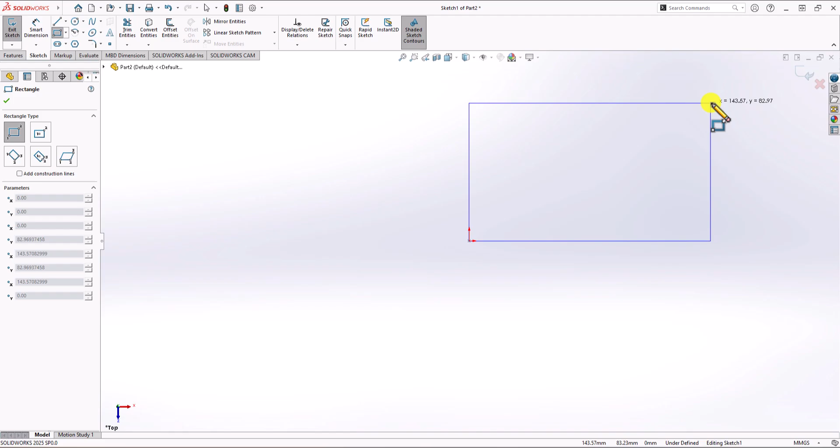In SolidWorks, first thing first, we need to check unit of measurement, and you can see we have millimeter gram second, which is a correct unit of measurement. Now, I'm going to start with a sketch, click on a sketch, and I'm going to choose top plane. Now, what we need here is a rectangle. Click on rectangle command, and then here I have the rectangle. Looking at the question, you can find the dimensions for this rectangle. Click on the smart dimension. The width should be 260 and the height should be 180.

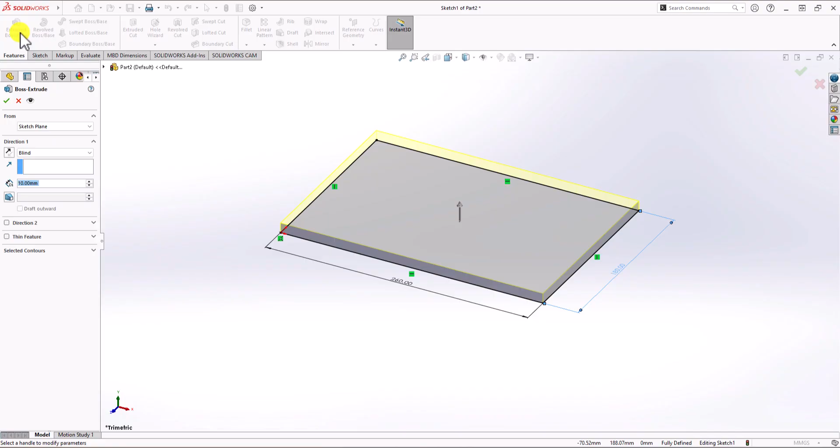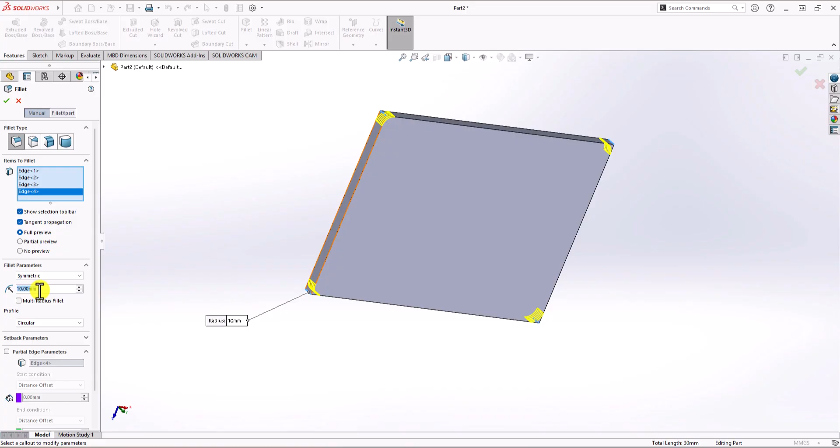Okay, so now I have the plate. Let's click on feature, click on extruded boss, and I need 10 millimeter thickness, which is here, and then click on OK. So now I have the plate. Of course, we need the fillet radius in the corners. So let's click on fillet. And then here, I'm going to select this corner, this one, and last one. The radius for the fillet, according to the question, should be 15 millimeters. So this is 15, click on OK, and now I have this plate.

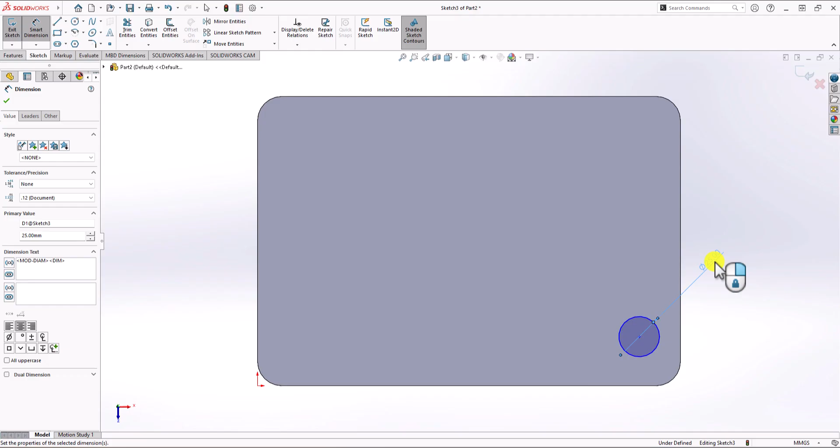Okay, so now it's time to make one hole. Click on a sketch, click on top surface, and this surface is selected. Click on circle command, and I'm gonna make one hole here. According to the question, the diameter of this hole is 25 millimeters, so this should be 25. The distance between the center of this hole and right edge should be 40 millimeters. So I click on this center point, right edge, and this should be 40. And the distance between the center point and a bottom edge should be 45.

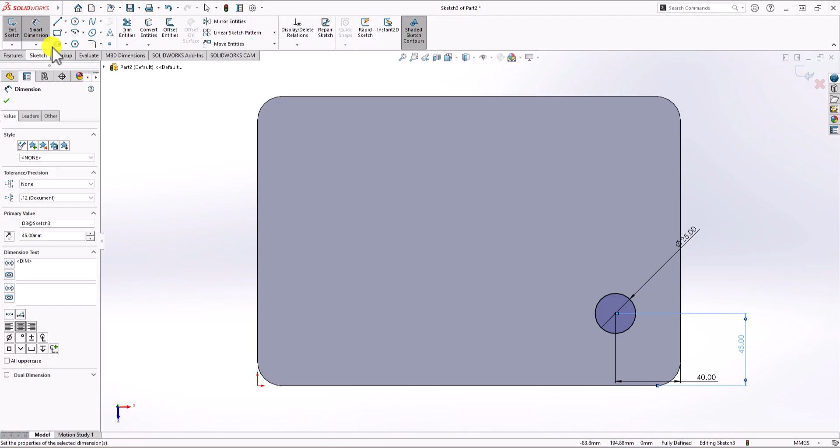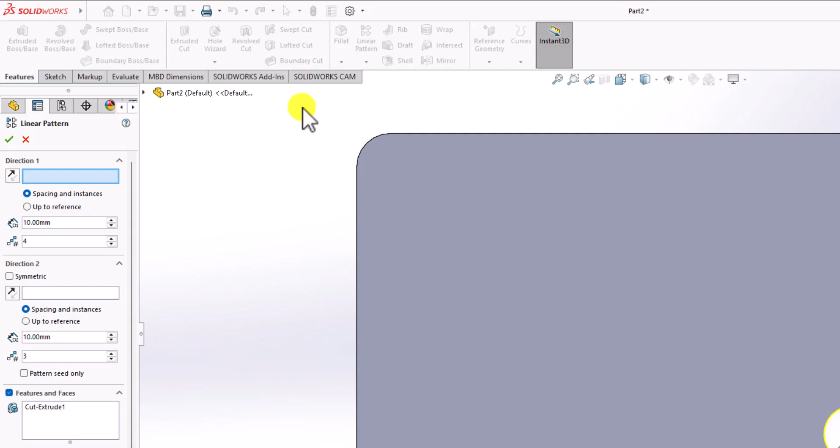Okay? Now, all we need to do is just making that hole. Click on feature, click on extruded cut, and then here you can just select through all, click on OK, and now I have one hole. Next step is clear, using linear pattern to make multiple holes. So from feature, I'm going to select linear pattern. And then here, you can see that the hole is selected in features and faces. If it's not selected, simply click on drop down menu on a model tree and select it here. So I select it.

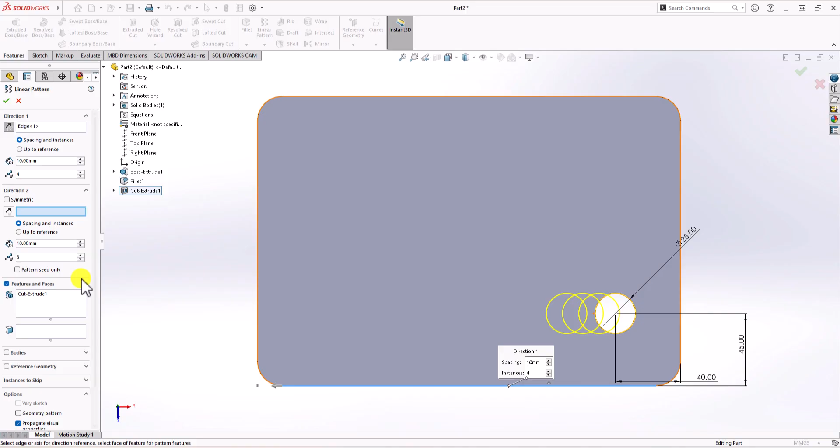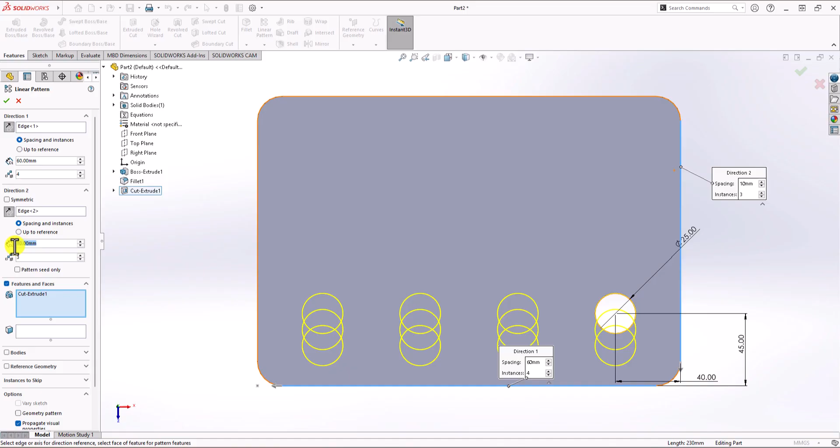First direction. So I'm going to choose this edge as a direction of the pattern. You can see the direction is to the left, and the distance between these patterns should be 60 millimeters. So 60, and number of pattern that I need is 4. So that's correct. Next step is this part. So second direction, I can click on this edge and you can see the direction. Let's add the distance. The distance should be 45. So I click on 45.

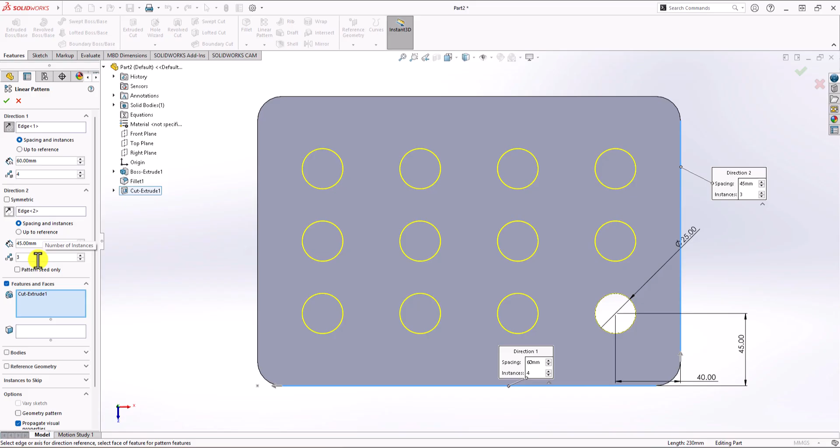Clearly you can see that the direction is wrong. So you can click on this arrow, reverse direction, and now you have the correct direction. And number of pattern is correct. We need 3 and we already have 3. So you can see the preview. Everything is perfect. So click on OK, and now you can see the pattern. Okay, awesome. So that's the final geometry.

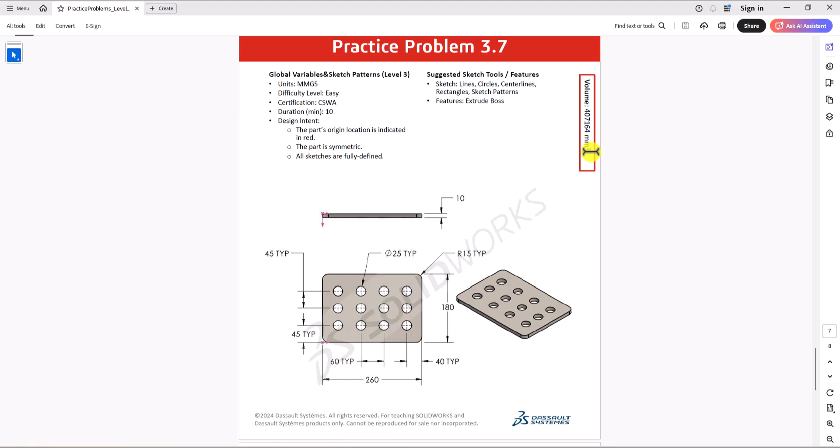It's time to check the total volume and make sure this is a correct geometry. So let's go back to the question and check the total volume. In the question, you can find the total volume shown here. The total volume for this object is 407,164 cubic millimeters. Let's go back to SolidWorks and check the total volume for our model.

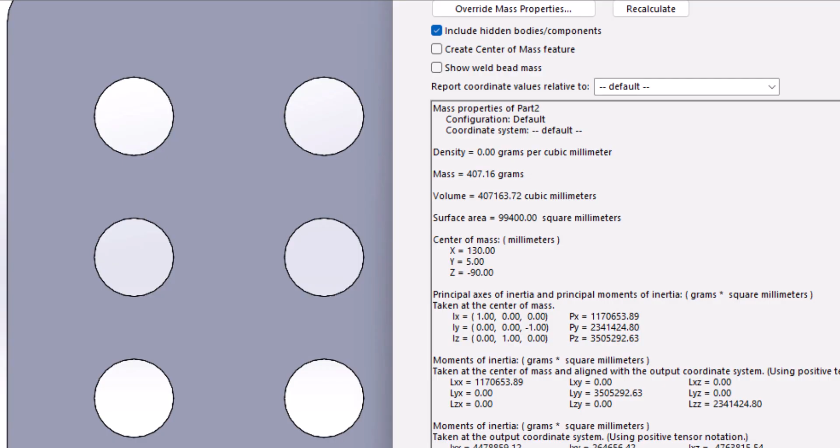In SolidWorks, in order to find the total volume, you can click on Evaluate tab and then click on Mass Properties. And here you can see the total volume. The total volume for our model is 407,163.72 cubic millimeters. If you round up this number, you're going to get exactly the same result as shown in the question, which shows our modeling is correct and there's no problem with it. Okay, awesome. So that's a wrap for this video. It was a quick video, simple geometry.